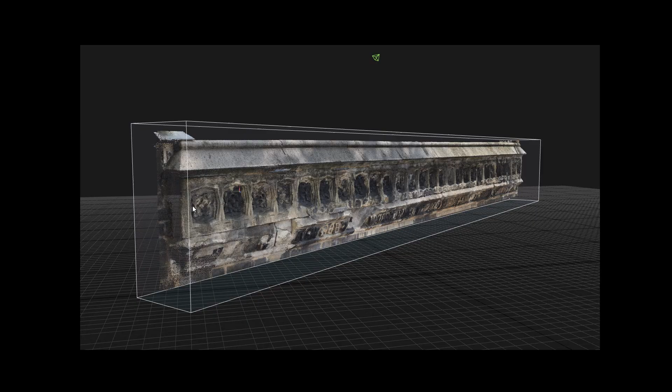And while the video is running through, I want to share some statistics. These suggest that every one of our disciplines has an urgent task to get the technology and the use of people right, and to do that quite soon.

When my grandparents were born, there were 2 billion people on the earth. I was born 60 years later into a world of 2.5 billion, a growth of just 1/4. Another 60 years and we passed 7 billion, a growth of 2 3/4. And now, just 15 years later, we have 8.2 billion planetary compatriots, already 1/6 growth in half a generation. All these people need housing, feeding, clothing, heating, and medicating.

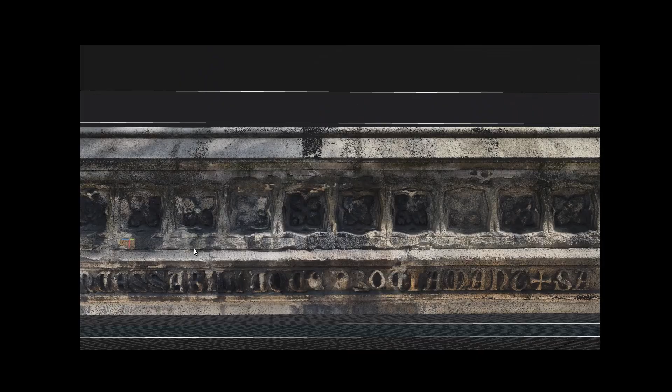And every person who does no physical work must be supplanted by a machine that also, after mining and manufacture, needs the industrial equivalent of housing, feeding, clothing, heating, and medicating. Meanwhile, because of machines and all the fuels, since 1992 we have added 2 parts per million of CO2 into the atmosphere every single year, except last year, when we added 3 parts per million.

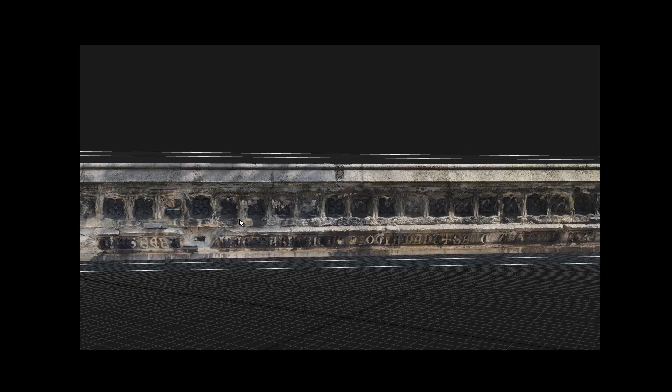Our underlying agenda is an ever more urgent global discussion about the impact on people and nations when integrating technology with traditional and modern crafts in the built environment.

50 years ago, we were surrounded by hand-built environments with places for many crafts, dexterous and tradespeople with manual arts and crafts skills. Machines are not new.

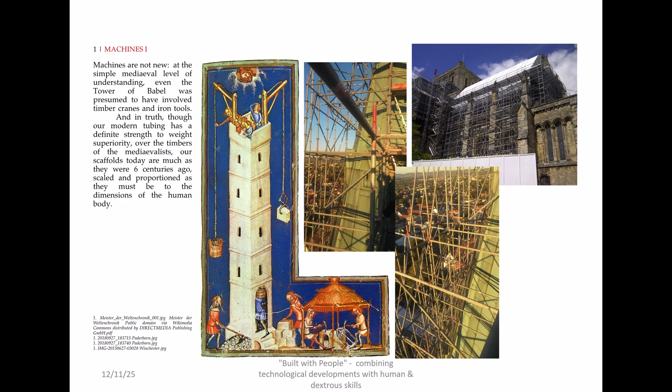Even the Tower of Babel presumably had timber cranes and iron tools. And though our modern tubing has a strength to weight ratio superiority over historical scaffolds, they were much the same as 6 centuries ago, scaled and proportioned as they must be to the dimensions of the human body. Modern materials also make for the chance to work all year round instead of stopping in the winter.

Technological prowess today is not intrinsically good. Here at Winchester Cathedral roof, this extraordinary prefabricated temporary roofing structure frame sat on the ground for several unintended days while engineers recalculated counterweights for the crane.

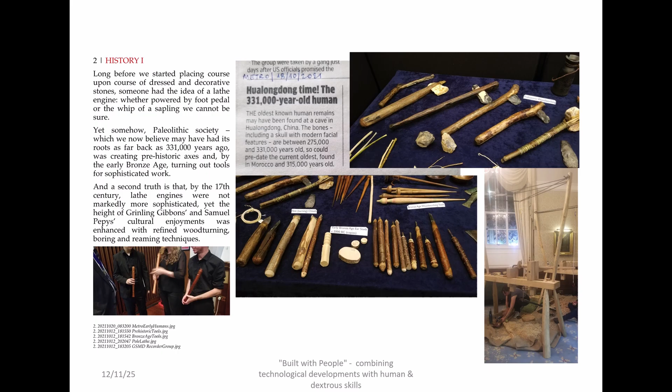Long before we started placing stones course upon course, someone had the idea of a lathe engine powered by foot pedal or the whip of a sapling. And the Trulli field huts in Calabria represent a manual tradition of construction dating back several thousand years, quarrying and rough working stone into dry stone walls.

And in 1357, when the Judith Bridge in Prague was reconstructed in stone, this model in the Charles Bridge Museum shows a painstakingly logical sequence of construction, from driving piles and pumping water out to layering a roadway over the arches.

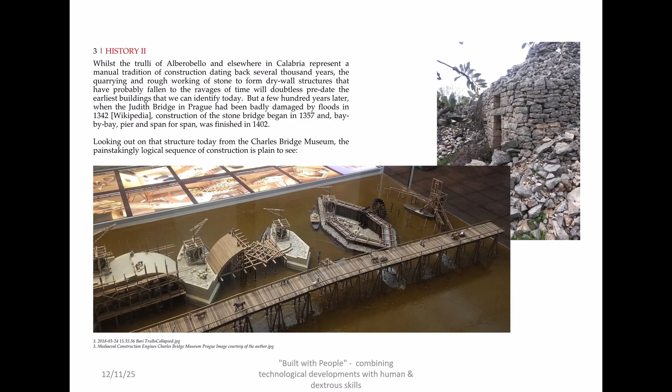The breathtaking sight in the bottom middle picture of vast medieval workshop barns, piled and stilted over the water, supported by a heartwarmingly familiar plethora of trades on the dry embankments, is all laid out in the museum's fine exhibit case.

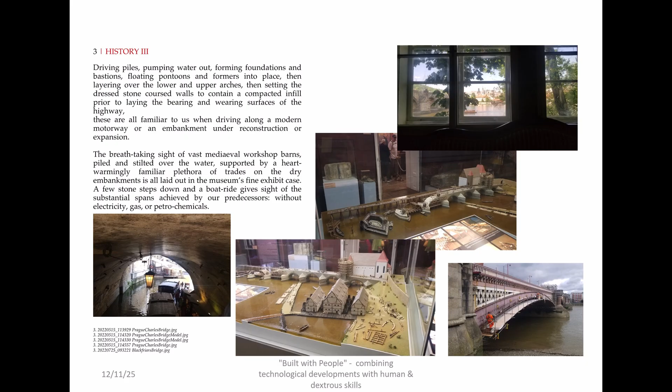Conversely, in human-free construction, forecast in 2017 by the international infrastructure group Balfour Beatty, off-site components would arrive on driverless trucks, be assembled by robots, overseen for accuracy by GPS drones, and the remote control of machinery and new materials and techniques expects to improve cost, safety and efficiency. There is a place for that in the world.

Many livery companies are at the forefront, makers in metallurgy, hardeners in plastics and the like. Looking at the clockmaker's art in Jean Nouvel's Paris facade, one can foresee how the Institut du Monde Arabe, built in the 1980s, might very well now be constructed in that manner.

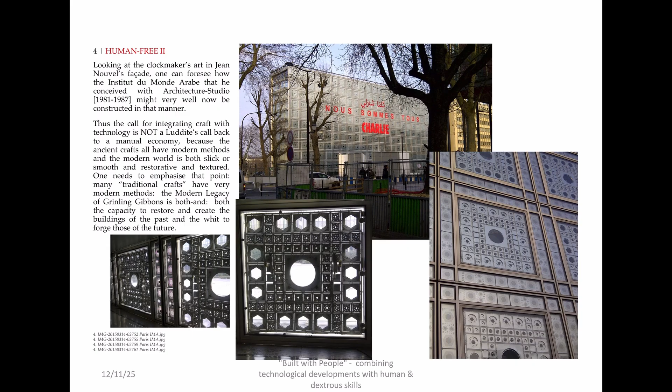Thus, the call for integrating craft with technology is not a Luddite's call back to a manual economy. Ancient crafts all have their modern methods. But the advantages of technology and energy-intensive manufacture do not always trump the economic cycle.

Government's own research into UK employment from 1861 to 2018 notes how the employment rate is in the long run affected by developments in educational attainment, wider economic policy and business cycles. Danube House in Prague's business district was made at a time when the Czech economy was far behind that of Germany or France.

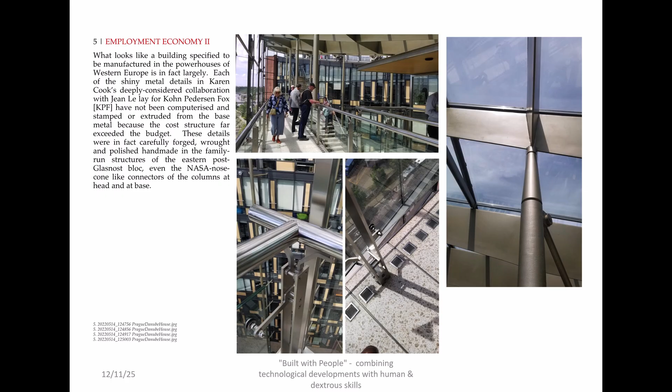What looks like a building specified to be manufactured in the powerhouses of Western Europe, all the shiny metal details have not been computerized, stamped or extruded from the base metal, because the cost structure in Czechoslovakia far exceeded the budget. But forged and polished by hand, they could be afforded.

Recent research with Exeter University explored the role of digital fabrication compared with digital craft participation in improving well-being, particularly for those from disadvantaged groups. Many studies have shown the positive value of creative craft sessions on mental health and well-being. The Bartlett School of Architecture's team for digital stone construction hopes to develop robotic random rubble wall construction.

Saving all manner of human risks and wear and tear, and being able to build structures such as these trulli. Now, where would the mason's capacities be gained from apprentice to master, and who pays both the active machines and the passive people when the machines take over?

At the entry to Stonecutter Street here in London, number 2 is announced by lettering designed and incised with computerized numerical control. There is no stone cutter here, and even an untrained eye will comprehend that these clergy memorials in Winchester Cathedral

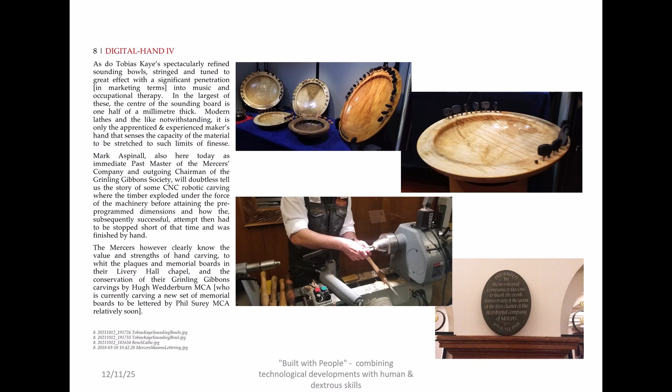Betray the human hand of the mason who made, and the letterer who inscribed them, as do Tobias Kaye's spectacularly refined sounding bowls, stringed and tuned to great effect with significant penetration into music and occupational therapy. In the largest of these, the centre of the sounding board is just half a millimetre thick. It is the apprenticed and experienced maker's hand that senses the capacity of the material to be stretched to such limits of finesse.

So the question arises, who programs the technological systems? Who runs the machines? Who selects materials and controls quality to match how a master produces complexity and delight, as in these vault stones at Wenceslas Hall in Prague?

Apprentices must have traditional learning in techniques and materials. Technology must not supplant the base tasks which teach any apprentice their trade. Not everyone has the mindset to work with computer numerical controls. Much dignity of work and the well-being benefits are derived from craft.

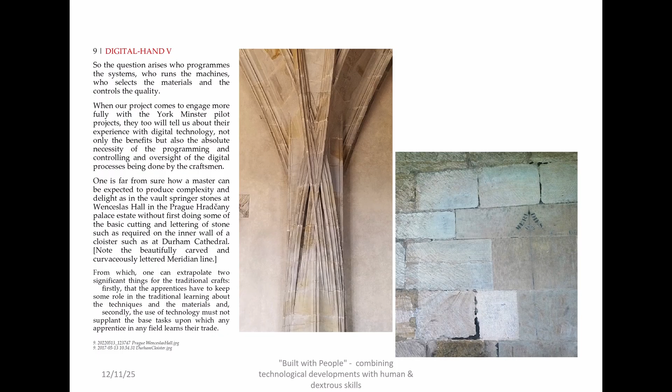At Aylesford Priory, this young lad, captivated not by the array of cakes but by a hand-carved sculpture of an infant with a friar, indicates how handwork and natural products are of significance to the human mind.

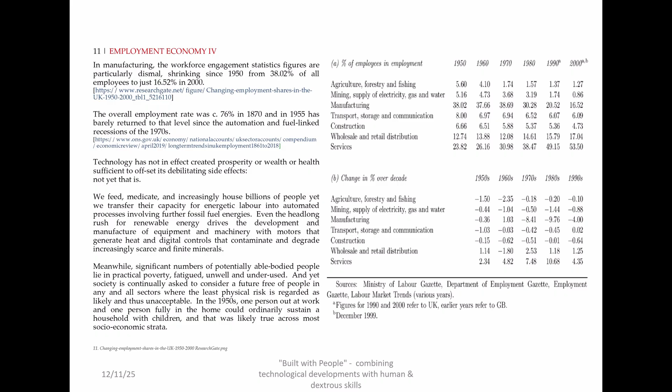It has hardly ever returned to those levels since automation and the fuel crises in the 1970s. Technology has created neither prosperity, nor wealth, nor health sufficient to offset its debilitating side effects. Feeding idle people, while also resourcing labour-saving technology, is unsustainable.

Just consider the vaping devices, their CO2 and their waste output compared to the cigarettes they replace, and the factories required to make the vaping equipment being so much more technologically refined than the tobacco rolling factories of the past. The development and manufacture of technologies generate heat and degrade increasingly scarce materials, but it is not a change which is making many of us happy.

Dexterous work alleviates anxiety, depression, loneliness, even dementia. It heals the mind and creates pride. So I move on to the stone workshops at York Minster.

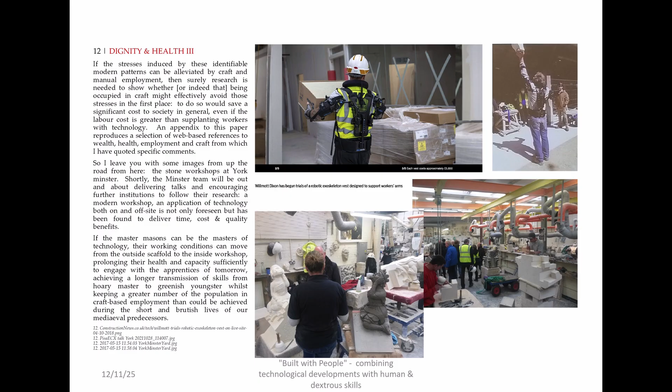First, their trials with exoskeletal personal lifting gear and air-powered tools. Then a new computer-controlled principal cutting shop. Now the master masons are mastering the technology. Their work moves from the cold scaffold to the warm workshops, deferring retirement and engaging longer with the apprentices of tomorrow. So dexterous capacities gained through apprenticeship journey right on to mastery of the materials.

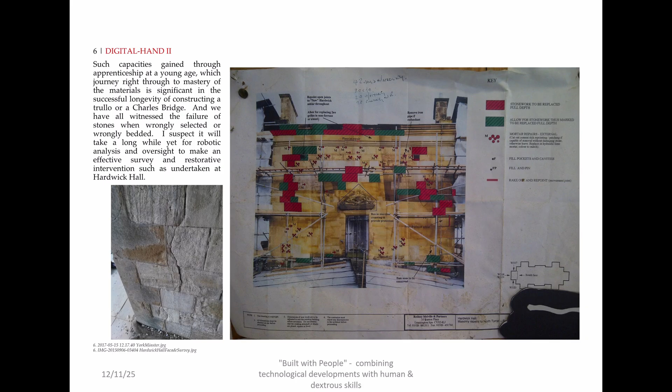That enables analysis and oversight to make an effective manual survey and restorative intervention, such as undertaken here at Hardwick Hall. At Cologne Cathedral, their digital scan of the entire building enables their trained masons to predict the future repairs for next summer without first erecting a survey scaffold this summer.

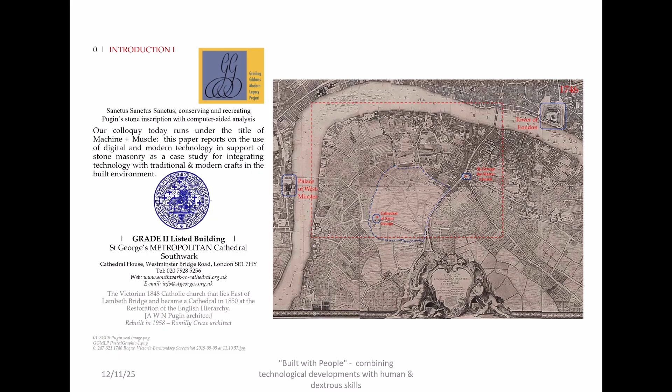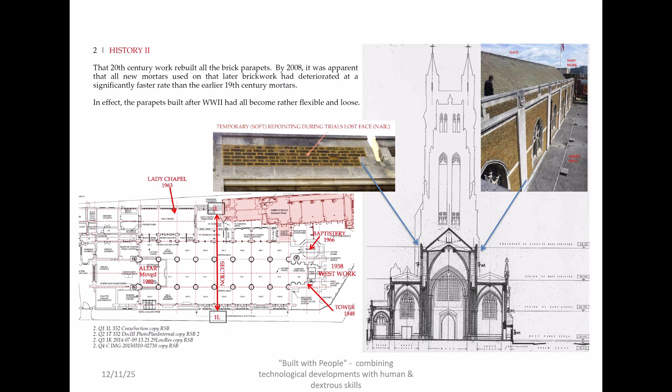We see an original Pugin church opened in 1848 and then firebombed in 1941, and then from 1953 rebuilding under the architect Romilly Craze, and the significance of the study is the effect of fire and of a post-war roof system. Romilly Craze rebuilt all the brick parapets, but his mortars in the modern brickwork deteriorated significantly faster than the early 19th century mortars.

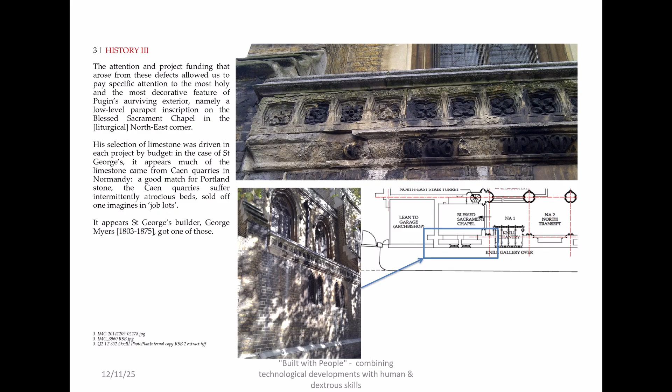The attention and the project funding that arose around these high-level defects allowed us to pay specific attention to the most holy and most decorative feature of Pugin's surviving exterior, namely a low-level parapet inscription on the Blessed Sacrament Chapel in the liturgical northeast corner. But it turned out to be heat damaged from the firebombing, and Craze had then backed that frieze with a concrete flat roof affecting the water and dampness.

The inscription is a text from the Te Deum: Tibi cherubim et seraphim incessabili voce proclamant: Sanctus, Sanctus, Sanctus.

We knew there would be significant losses during conservation, consolidation, cleaning, and interpretation, and some of the carved inscription was eroded, other parts were fully intact as if carved recently. Some were intact with a pollutant crust of white calcium from the rain runoff or black crusted from sulfation layers. Yet some remain happily intact without anything more than surface carbonation forming a yellowish calcium oxalate.

CadPlan undertook a 3D LiDAR scan of the inscription, resulting in a point cloud representation. Some 150 photographs were calibrated to the surface of the inscription, then mapped or pasted onto the model. That gave a 3D interrogatable record of the condition before conservation.

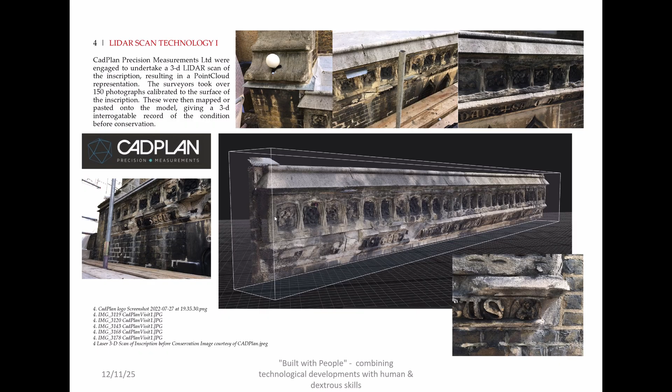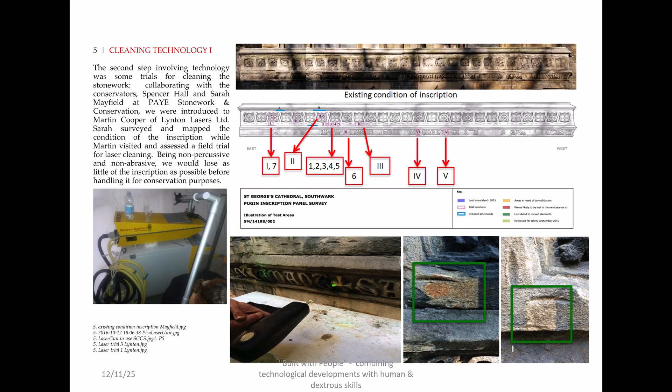The second step, involving technology, was some trials for cleaning the stonework. Spencer Hall and Sarah Mayfield at PAYE Stonework and Conservation introduced us to Martin Cooper of Lynton Lasers Limited. Sarah surveyed and mapped the condition of the inscription with iPad photos and markup tools. Martin assessed a field trial for laser cleaning being non-percussive.

And you'll see a little square appearing in the middle. The laser is gradually cleaning that tiny bit without touching the material.

After the field trial, Sarah then tested several adjacent sections of surface using mechanical wet water and chemical poultice techniques for comparison. None of these matched the capacity for the laser to remove the blackened and accreted pollutants without also removing material that might yet be saved. And so the laser system was employed throughout the valuable lettered inscription.

The laser treatment exposed heat fractures in the inscription, which are best ascribed to heat from firebombing in the war, shown on that L to the bottom left-hand picture.

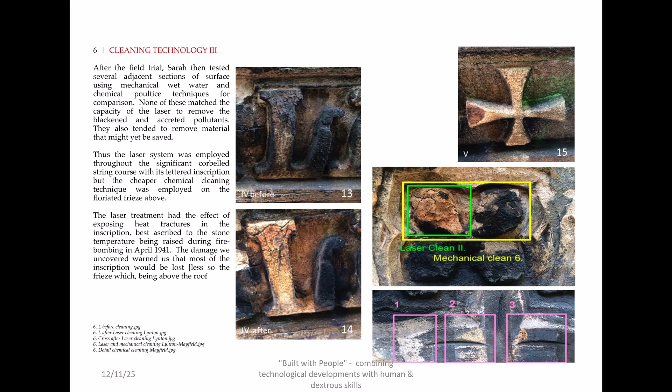As an aside, I think one can safely surmise that the inscription had been entrusted to a master carver, or at least a highly experienced journeyman, whereas the floriated frieze was apparently delegated to more junior masons, perhaps even to some advanced apprentices. Small samples of lettering that came away during the cleaning could be sent for electron microscope analysis.

At WHD Microanalysis Consultants Limited, Nick Winter's work there helped to identify the variation between black gypsum atmospheric reactions that are resistant to cleaning techniques as opposed to softer black petrochemical airborne grime that sits on the surface of the stone.

And this technological data helped to identify the true original profile of the master mason's work. Some apparently clean sound letters were in fact entirely unattached to the string course, being held there by dust and grime that had permeated behind the letter.

This U shown here actually fell away completely whole as I touched it, and such letters could not be saved in situ, but did serve to inform the reconstruction.

Sarah and her colleagues worked over all the carving, mostly conserving, cleaning, and then protecting the inscription with a stippled mortar coating. And throughout that work, Sarah documented the carving on her iPad, logging before and after conditions and which technique was used where. And thereafter, in her studio, she was able to set out the whole inscription as it might have been.

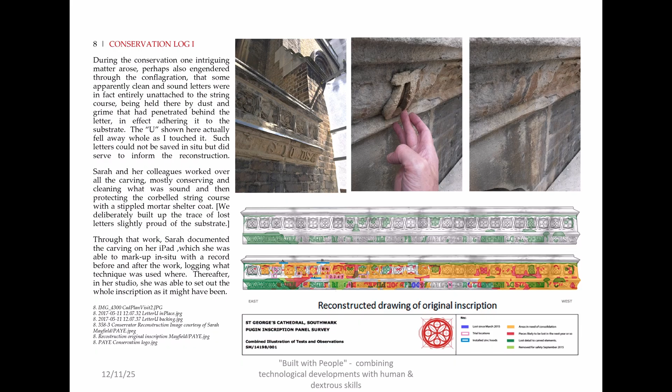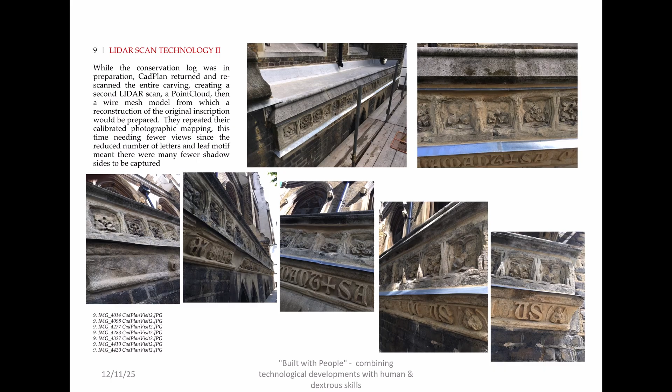CadPlan returned and rescanned the entire carving, creating a second LiDAR scan with a point cloud and then a digital wire mesh model from which a reconstruction of the original inscription would be prepared.

And where the original lettering had survived mostly intact, the 3D data of clean surfaces plus that salvaged letter U would prove useful to the computer artists John Jones and Brian Buxton at Vis3D.

I shall simplify and telescope the steps involved in forming a digital reconstruction of the inscription, in part because John and Brian at Vis3D went through a vast number of iterations and I'm not certain of which digital file format preceded which other. Vis3D first assembled the 3D data into a set of wireframe and surface maps from which they could establish the profile and the sectional run of the lettering and the substrate.

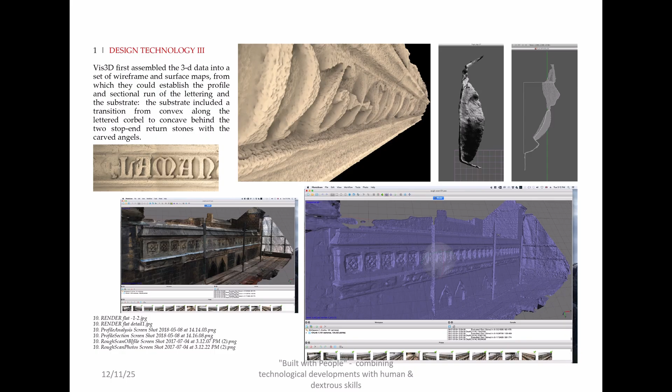The substrate included a transition from convex along the lettered corbel to concave behind the two stop-end return stones with the carved angels. And as both the artist and a computer renderer, John Jones could get his mind around the multiple data sources and into the mindset of the original stonemason. He consulted master carver Hugh Wedderburn about the nature of carving and how the undercut or serif or arrises might have been approached.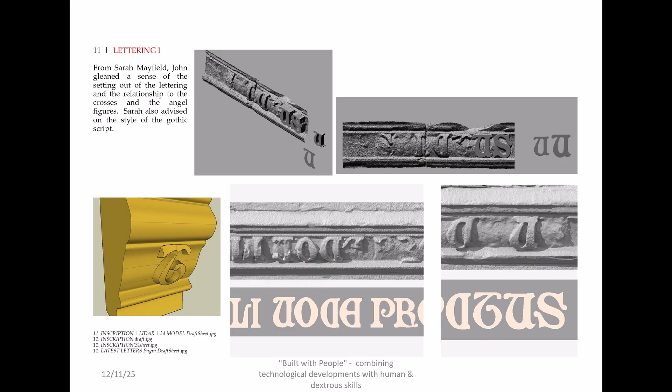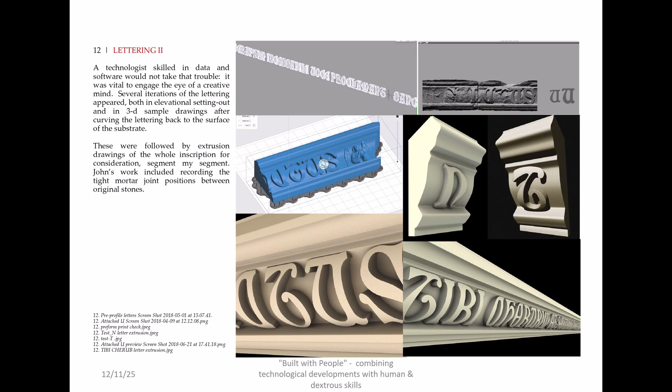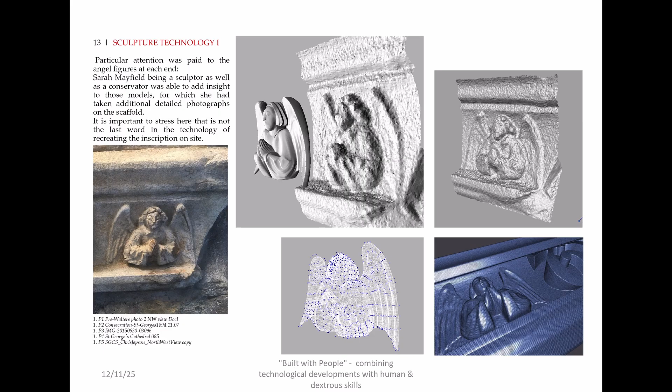Sarah Mayfield advised on the setting out and style of the lost Gothic script and its spacing to the crosses and angel figures, which John then modelled in 3D CAD software. A technologist skilled only in data and software would not take that trouble. It was vital to engage the eye of a creative mind with the advice of a carver and a conservator. Several iterations of the lettering appeared segment by segment, and John's work included recording the position of tight mortar joints between the original stones. Particular attention was paid to the angel figures at each end, and Sarah Mayfield, being a sculptor as well as a conservator, was able to add insight to those models, for which she had taken additional detailed photographs on the scaffold.

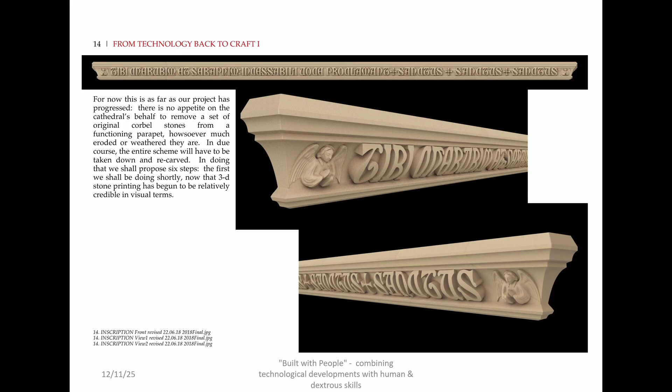For now, there is a set of original corbel stones in a functioning parapet, howsoever much eroded or weathered they are, and in due course the entire scheme will have to be taken down and recarved. In doing so, we will also learn from the pilot project at York Minster and from recreating a finial and modelling a statue of the late Queen for the West Front. There are six steps integrating skillful people with leading technology, which we might talk about if we have time.

But for sustainability, first, within our respective livery climate action roles, there is a message to take back and a part to be played, both in the built environment and in other sectors. We are none of us quite sure whether energy savings made with new technologies really do offset their embodied footprint during their lifespan. But we do know that every physical action undertaken by a human being makes an energy or CO2 saving compared with doing it by machine. I have set out some research and statistics about this fundamental necessity - the necessity not to supplant people from the workplace, but to connect technology with people in productive work.

And I've touched upon several pilot projects at York, Cologne and St George's Southwark, which have played a part in generating our Built with People initiative. The initiative follows preliminary meetings with Alison Gowman, among others, including Juliemma McLaughlin, formerly the city's Director of Environment, and it draws together discussions with affiliates at the King's Foundation and York Minster, with some of the maker liveries and the Architects Company. Subsequent conversations indicate now is the right moment to engage on a broader footing to establish a profit-for-purpose entity that enables the developer and constructor sectors to derive benefit, sustainability, viability and safety from a workforce with dexterous skills, with experience of materials, with a route for lifelong and continuous retraining, for the workforce to be fully supported by technology and artificial intelligence.

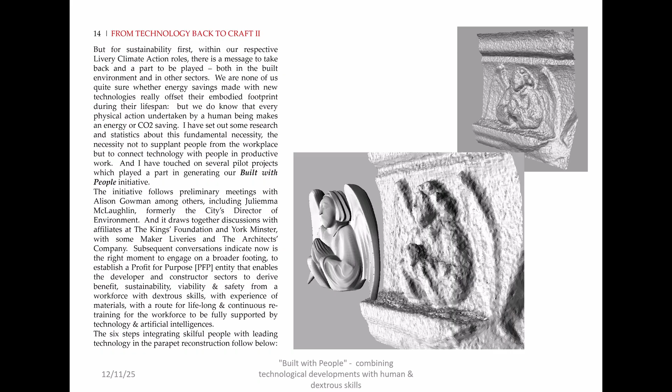If we were going forward with the parapet project, the 3D model would be printed at 1:20 scale and displayed in the Cathedral as an informative reminder that we do know what we should be having and seeing on the outside of the chapel. Later, once the client wants to recreate the stone parapet in full, the 3D software model can be printed at a quarter scale in stone resin maquette.

This maquette could be worked over by the stonemason to refine the arises, the undercuts and so forth, letter for letter. At that juncture, a sample stone would have to be removed from the chapel wall in order to be sure of the dimensions and the profile and the building in of the carrier blocks. Then the mason would enlarge the maquette on the three built-in sides to match the built-in dimensions for the blocks and to oversize them slightly.

Then the reworked maquette with the full block modelling can be 3D scanned and the data prepared for CNC cutting, so that under the direct control and guidance of the stonemason, the blocks can be cut to within a millimetre or so of the intended finished surface. Finally, the mason would complete the carving and redress the hidden planar facets - in other words the jointing surfaces of the block for building - in order exactly to match the reconstruction required, and to bring the surface of the stone to a worked traditional hand finish which weathers appropriately, whereas machine finished surfaces on stone weather quite differently.